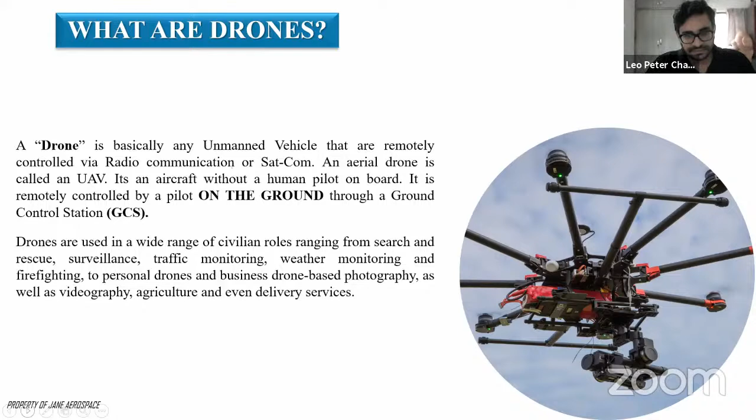So what are the types of drones? There are multiple types. The usual one we see is the multi-rotor variant, but we have other segments as well. Let's take a look and briefly see their advantages, disadvantages, and small use cases. Fixed wing systems are the early drones that came in. They look like a bird or an aircraft, and fly like one. You have longer endurance with them, lower power consumption, and another beautiful part is they have a glide ratio - so in case an engine or motor fails, you could still safely land the aircraft if you have enough velocity.

Now the second type would be the rotary wing or single rotor helicopter. These, after the fixed wing, were one of the early drones or UAVs that came out. Initial application was in cinematography plus agriculture. Way back in 1998, Yamaha built these helicopter drones for crop dusting, and they're being used and explored right now. We have the Schiebel Camcopter S-100, and a lot more - we have the Anavia and others using the same concept for heavy payload lifting and vertical takeoff and landing.

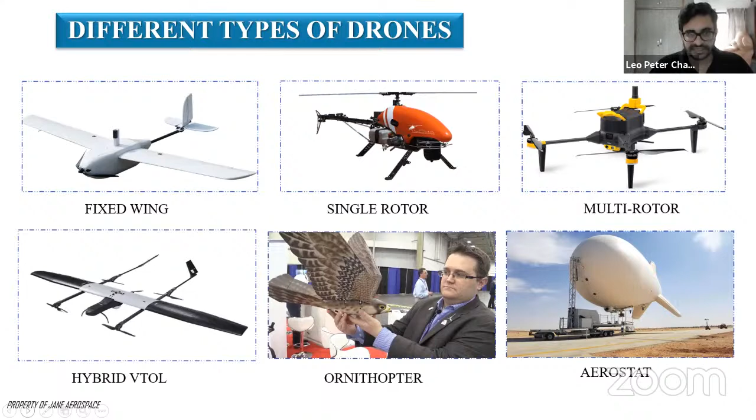So, introduction to windmill inspection. Windmills, one of the major sources of renewable energy and one of the major sources for carbon credit as well, are now being used along with solar power and tidal power across the planet to generate electricity to meet the needs of the country.

Windmills are generally 80 meters in height, that's about 250 feet, and the only way to get to the top is either to climb the ladder through the mast, or have a helicopter drop you on top. But the challenge with a helicopter dropping you on the hub is these locations are highly windy, with turbulence always created behind the windmill, making it difficult for the heli to land or drop somebody - it's always dangerous.

The other issue is climbing up means you cannot take a lot of equipment with you - it becomes very tedious. But these inspections need to happen, because over time, if inspections are not done, windmills will fail, and catastrophic failure is very dangerous since anything flying off from the windmill can affect nearby windmills. Fixing that entire mess is a huge problem.

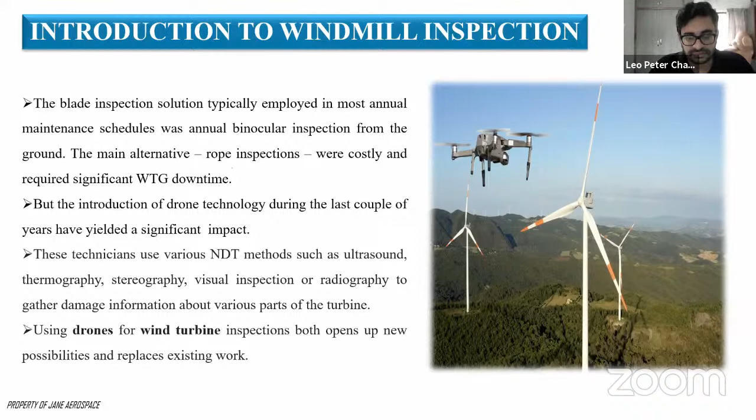So what they generally do is they have a very high resolution camera mounted on the ground that takes pictures. The problem with it is you cannot do upfront inspection, and you cannot do a very close inspection. Second, you will have to manually move the cameras to different locations for picturization, and you cannot have the sun at certain angles, because then you will never get the picture right. So that is another problem they face.

So that is one. Second, you will have to manually move from one windmill to another. The challenge is windmills are separated at a greater distance, and they are at different heights. Mostly they are on hills, so you'll have to go down and come up again, and that's time consuming, reducing the number of windmills you can inspect per day. So that is one method they did.

Second was you climb up to the windmill, somebody lowers you down or tethers you through a rope, and then you take pictures. The problem with it is, since these areas have high winds, you're always susceptible to swing, and during that, equipment can get damaged. The person doing the assessment can also be hurt. That also is a challenge, and with that much wind, getting a stable photo will also become a problem.

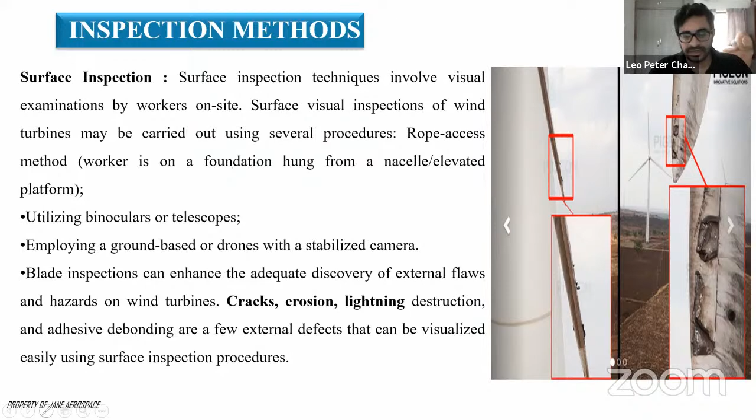So these are a few of the methods that are employed to understand. Subsurface inspection is very important because most of these blades are made from fiberglass to keep their weight low. The mast anyway is metal, but the blades are fiberglass. And you will need to understand crack propagation, because in composite material, crack propagation works very differently compared to a fully single metal or an alloy, right?

Now you will need to understand the thermal images. You will need to understand the shear. You will need X-rays of it. You will need to understand the stress patterns that are being developed.

And the best part also is if you are at a far distance and you have a very high resolution radiometric thermal camera, you can also see how the windmill is functioning, and you can study various indicators like the thermal image or the stress image when the windmill is in action. This cannot generally be done when using other methods like tethering down or climbing the windmill - you will have to stop it. But here you can do it, though you need to maintain a certain distance so that the drone doesn't get sucked in.

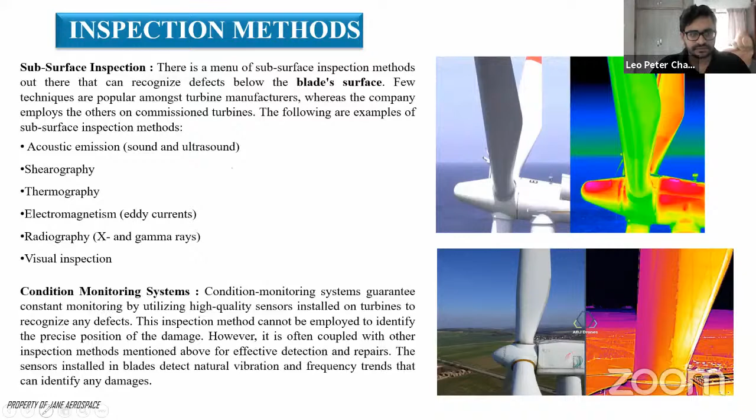These are a few of the images taken using drones, and you can see the details in the image - paint being worn out, the flesh of the blade being exposed, how much damage has incurred, and how you could repair these damages. That's another beautiful part about doing this. All of this data acquisition happens in a very short span of time.

There are multiple ways we can do data acquisition with a drone. Before we go there, let's talk about the payload. You can generally have single payloads or a coupled payload. Single payload would mean an EO camera, or electro-optic camera, for high resolution visual images. You can have a thermal camera for thermal images. You can have other sensors to collect various different data.

You can have an ultrasonic emitter to collect the thickness of the mast. You can also have X-ray equipment, contact based, to understand cracks. So these different payloads will have to go on a drone, and you'll have to choose a drone that could pick up these payloads. You can also do a 3D reconstruction of the entire windmill using the EO payload, which helps better analyze how these windmills sustain the impact of weather over a period of time.

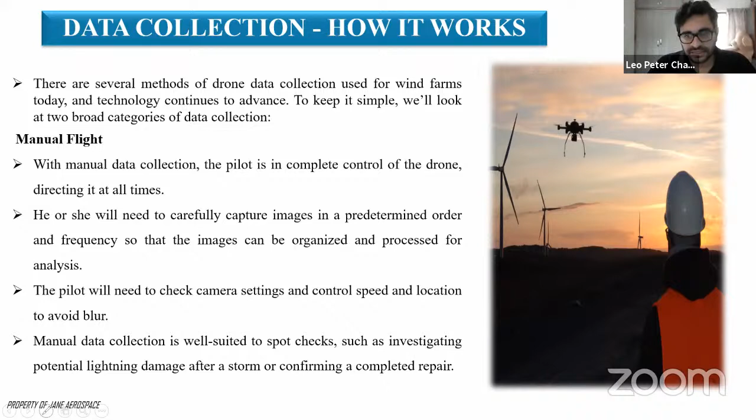The entire operation is not pilot dependent. Second, the drone chooses the best optimal route to gather the most amount of data, which makes a lot of sense for the manufacturer to run the maintenance. Third, every time this happens, the program evolves, and that way it becomes faster to get things done. And basically AI doesn't have the hesitation that it will crash the drone into the windmill.

Right now, when you fly from the bottom, the hub and the blade above it is even higher, 250 feet high, you will surely have parallax error and depth of vision issues to understand how near it is to the blade, and all of that becomes a challenge. And if you have the sun hitting your face, that becomes another challenge altogether.

But this doesn't happen with automated flight. The collision avoidance sensors on the drone will always make sure it's maintaining a distance. The algorithm running on the drone will account for wind direction, wind conditions, and gust speeds to determine the safe distance to be maintained from the blade, the hub, the mast, and it's continuously working. Manually flying, you cannot do that. It becomes very, very difficult.

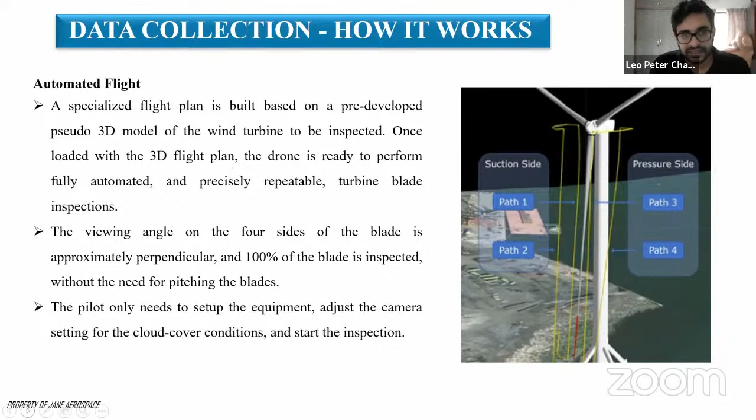For processing and analysis, first you will have to stitch the data. One is visual inspection—you look at photographs and identify where the damage is and what needs to be done. That's the report you submit to the OEM, and the OEM takes a call, because there are annual maintenance contracts. Governments or private parties buy windmills from the original equipment manufacturer, and they have annual maintenance contracts covering the scheduled maintenance of the windmill.

They take this data and decide what to do to make the windmill more efficient. Second is 3D reconstruction. Third is trying to understand stresses. Fourth is understanding the thermal emissivity of the windmill—if your generator is getting too hot, that's also another challenge.

So there are 4 important steps: organizing and sorting data, data processing, and data engineer review—an engineer from your side reviewing the entire data and its quality. Then you send it to the expert at the OEM, who reviews it and decides what needs to be done next.

Typically, the number of images that form a turbine's inspection database would be 300 to 400, depending on how old the turbine is, what detail we're looking at, and how critical it is. Now you have drones that fly inside the blade and take pictures, which wasn't possible before, because a human can only go from the hub to 30% of the blade, whereas the drone can travel up to 70% of the blade. That's a great advantage, helping to understand internal cracks.

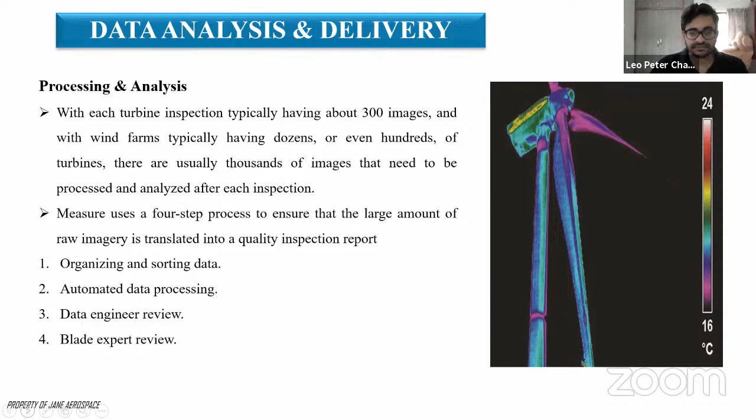So here's a brief explanation. The first part is where you capture data. The second part is where you organize the data depending on type, be it thermal, electro-optic, thickness testing, or stress testing. You organize it differently and provide it to the client. Then an engineer reviews the reports, and you provide it to the client, who has an expert to interpret that data.

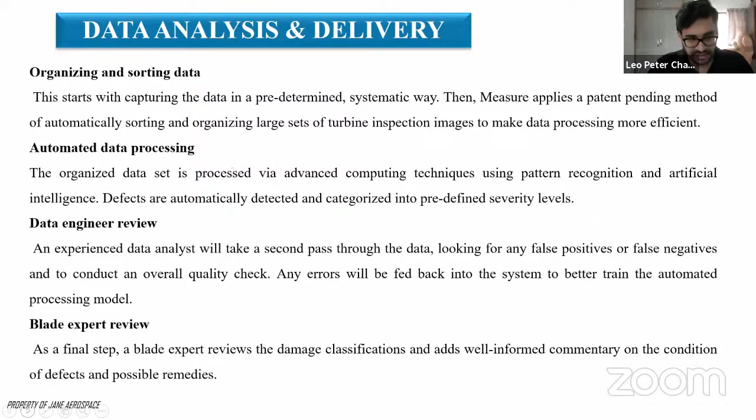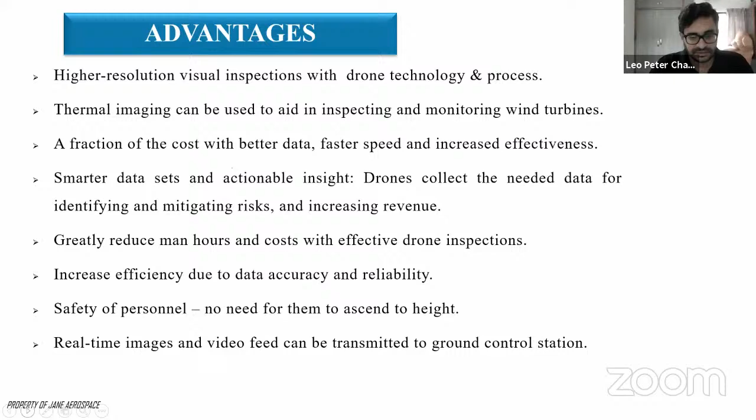Next slide, please. So let's switch.

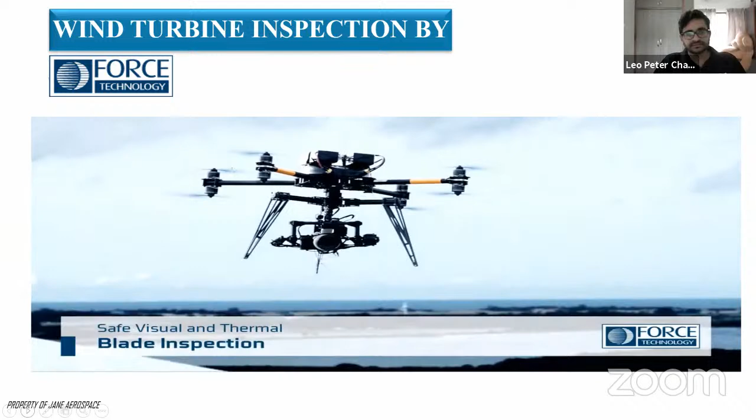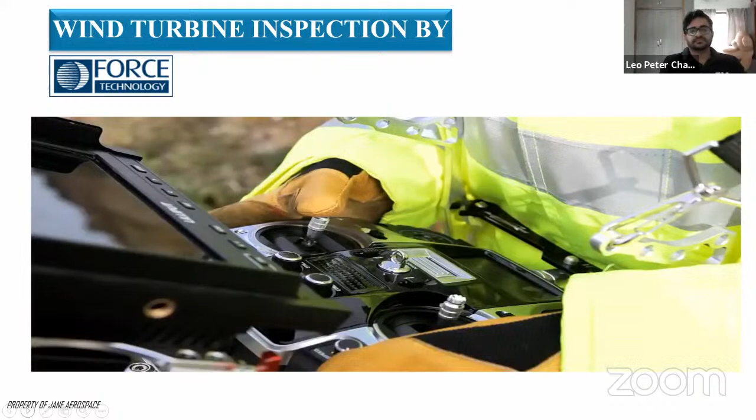Using Force Technology's advanced drones, it is easy to conduct blade inspections. The drones are continuously developed with image resolution and focus, providing unparalleled image quality. Remotely controlled without accessing the turbines, this ensures a minimum of downtime and production loss.

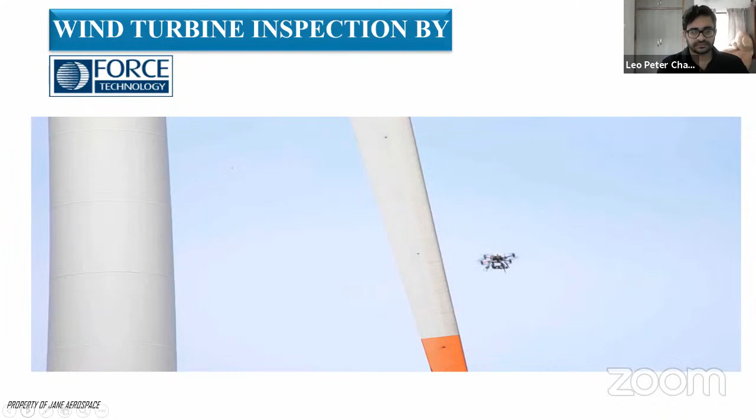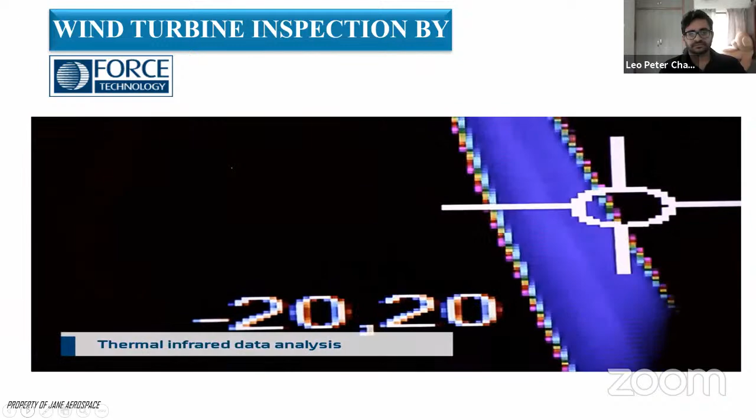After completing the on-site works, the data is evaluated by our expert, reported and documented. Using either visual imaging, thermal infrared inspection, or a combination of the two, we provide our customers with full documentation of the blade surface as well as some structural information.

Force Technology drone inspection provides an efficient mapping of visual damages to the blade, making it easy to plan repair works and general maintenance. Extent of inspection is done in accordance with customers' requirements, and reporting is delivered immediately after the evaluation.

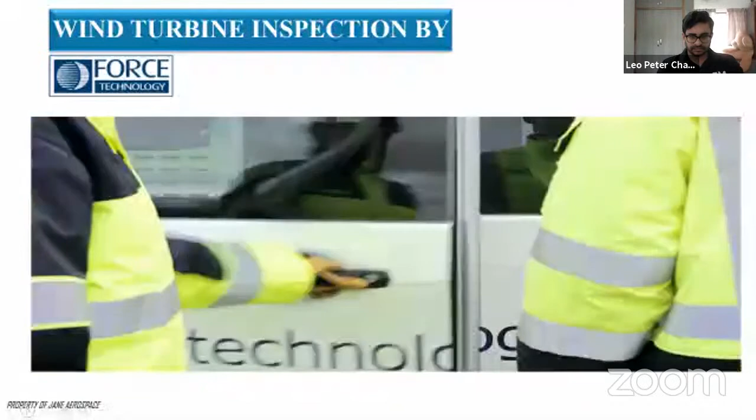So here you see this is a small video from Force Technology.

Another usefulness of this entire thing is you don't have to wait for reports like a week. You take the images, you can always send it via internet to your processing center, and they could prepare it in a day's time, and then in 2 days' time you will have the report, which was not the case earlier.

Second is, let's say you do manual inspection and then you climb up to the hub. By chance, if you leave any tool there, and when the turbine starts, that is always catastrophic, right? So that is now being 100% avoided during the inspection fully. This is another advantage that the drones have.

Next slide, please. Yeah, let's take a look at the video.

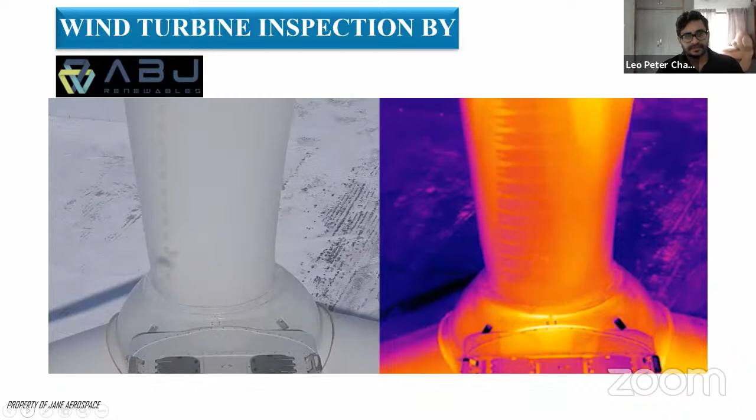So here you can see visual and thermal at the same time, it's a split screen. That's how close they can go with the drone, or zoom. Certain of these cameras come with 3x optical and then even 100x optical zoom.

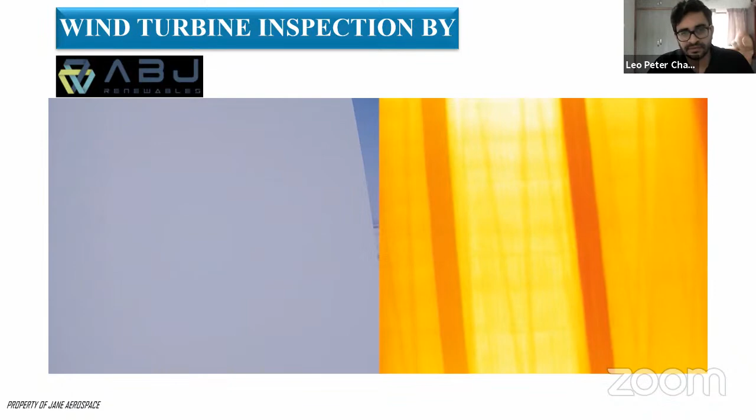Real-time feeds are clear. That way it even makes it easier to, if there's a maintenance engineer on the ground with you, it makes it easier to tell them what needs to be done.

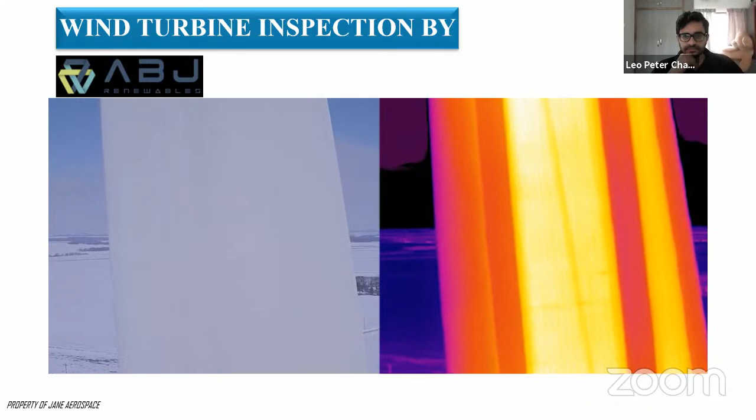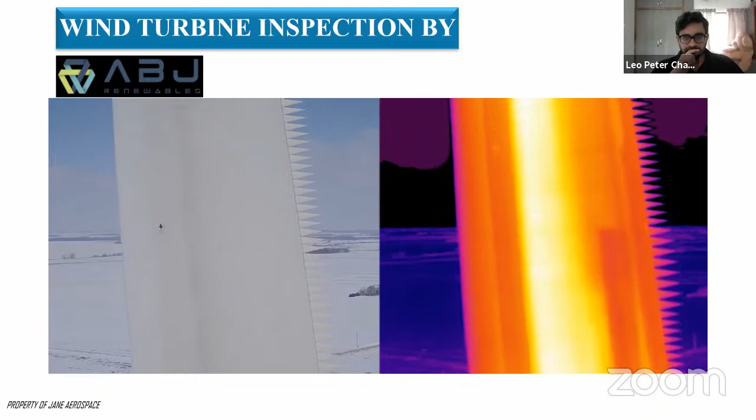Certain places, ice deposition also plays a very crucial role, that will also hamper the efficiency of this. So you have drones that clean or de-ice surfaces. What they do is they carry large de-icing agents that are sprayed on these blades that clean them.

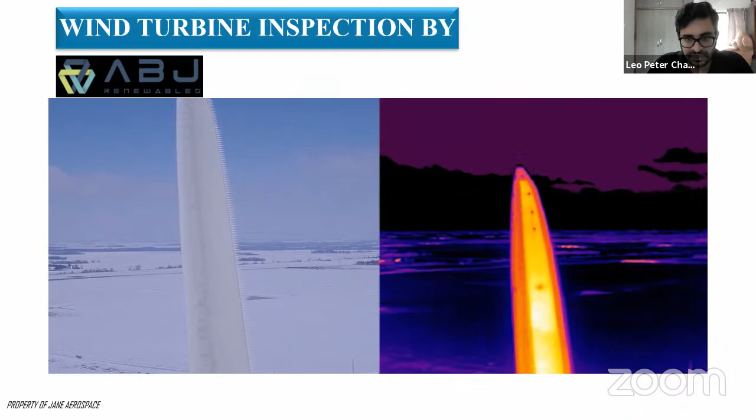So this is another way to see it. Next slide, please.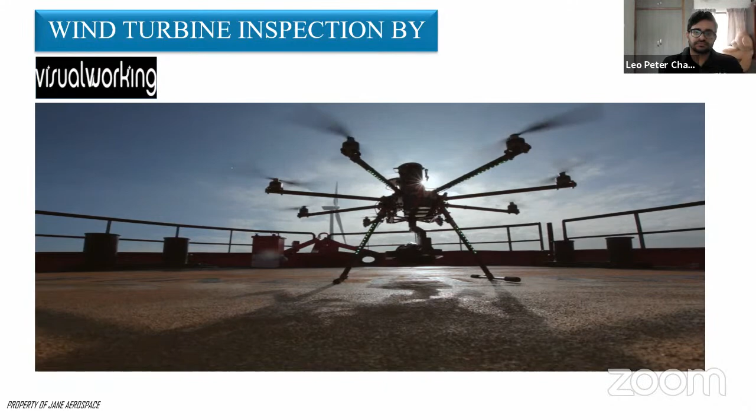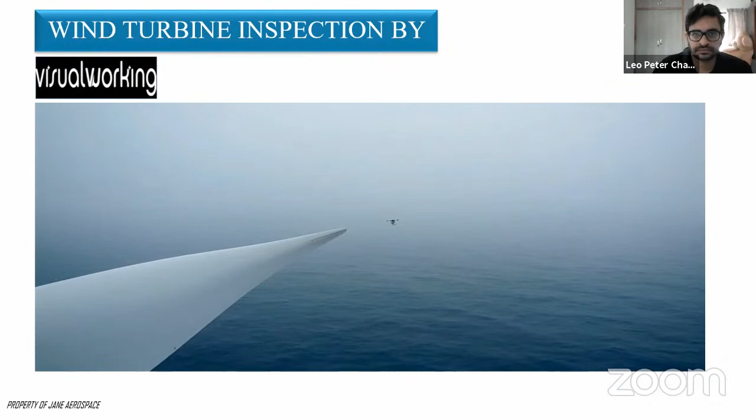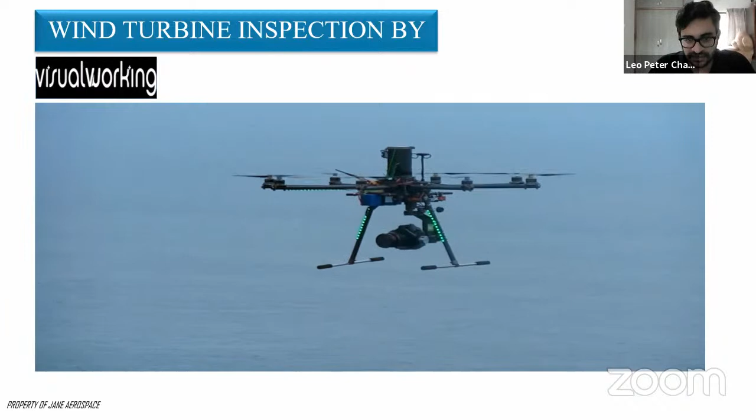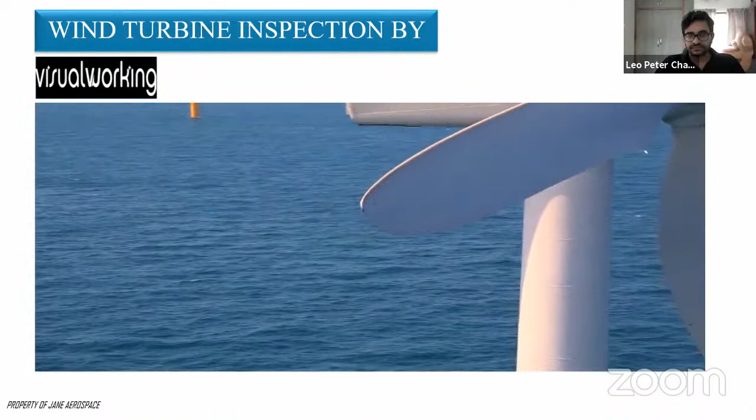This wind farm is located at 46 kilometers from the coast and is made up of a total of 165 blades.

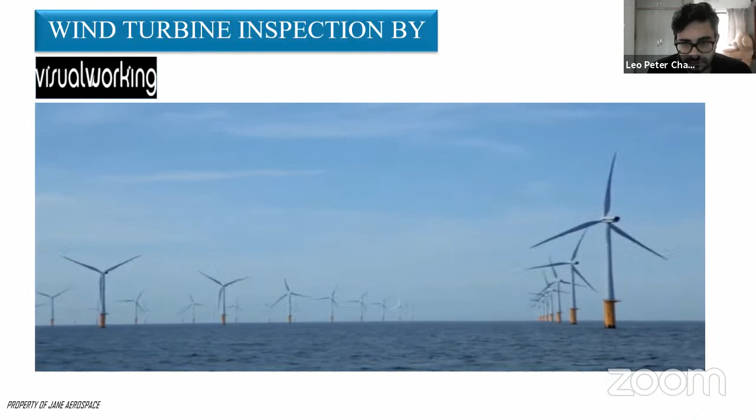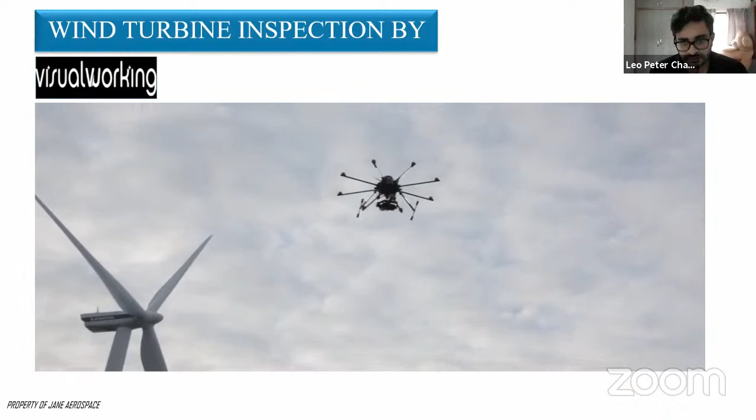Visualworking proved to be capable of delivering images of superior quality, with inspection time cut by 70% versus the standard approach of using rope technicians.

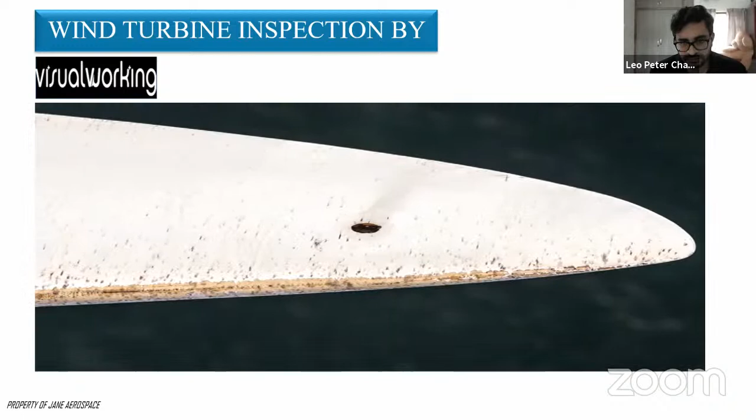A blade is inspected from all of its angles. So yeah, there's a very long video, you can always take a look at it on YouTube.

Here, another challenge that they've resolved is trying to dock the boat near the windmill, right? That is also a challenge that is time consuming. Here the drone just takes off from the boat and then does the inspection and comes back.

You really don't have to dock the boat near the windmill, then climb up, and all that time consumption, the time wastage that is there, that is being avoided. Next slide, please.

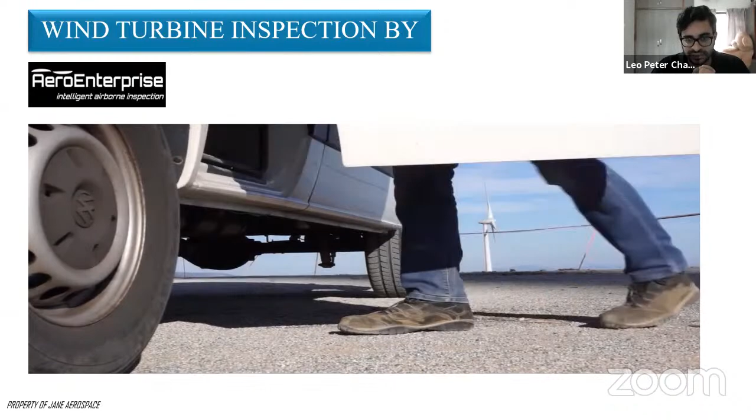You will see most of these inspections are being done by multi-rotor systems, not the great...

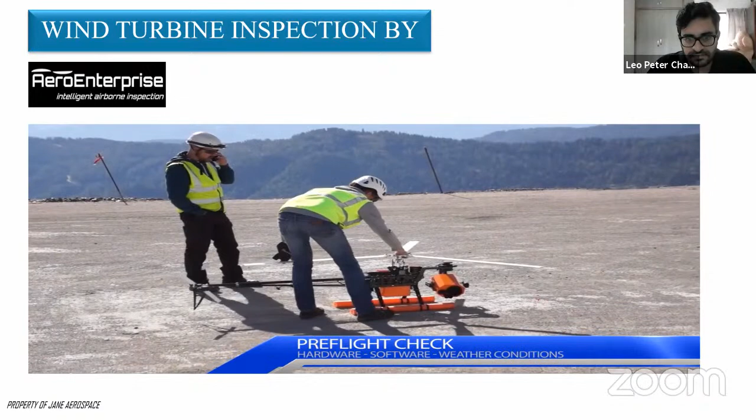And here you see the helicopter configuration for inspection.

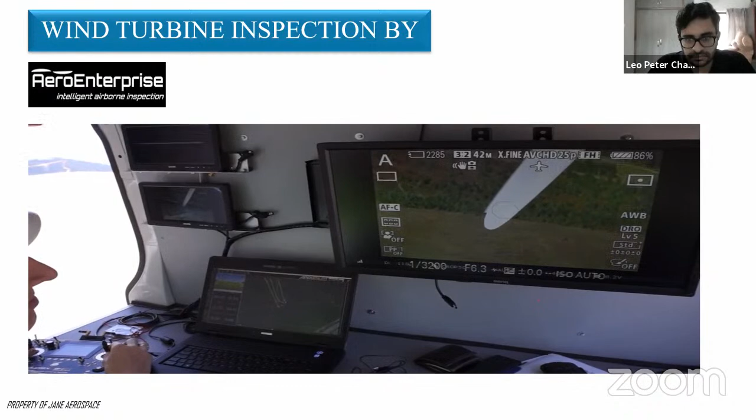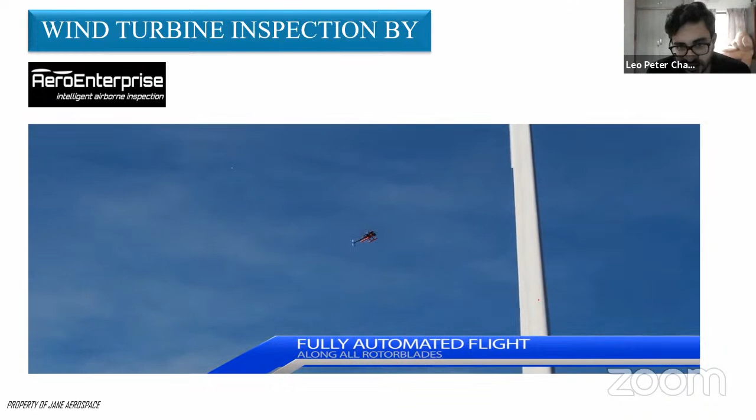Predetermined flight modes or flight paths that they enter, and then based on that, capture the next flight.

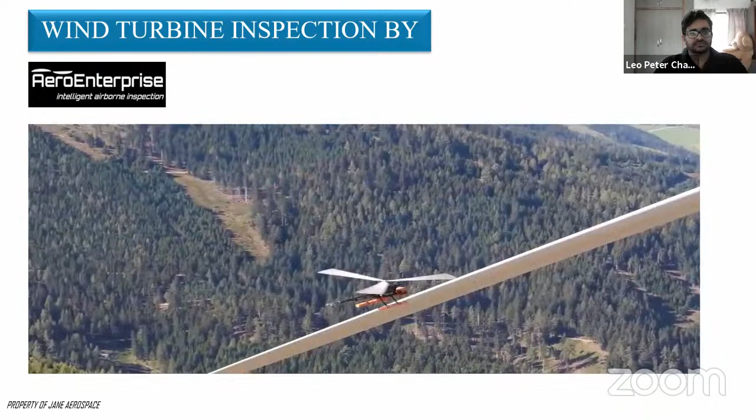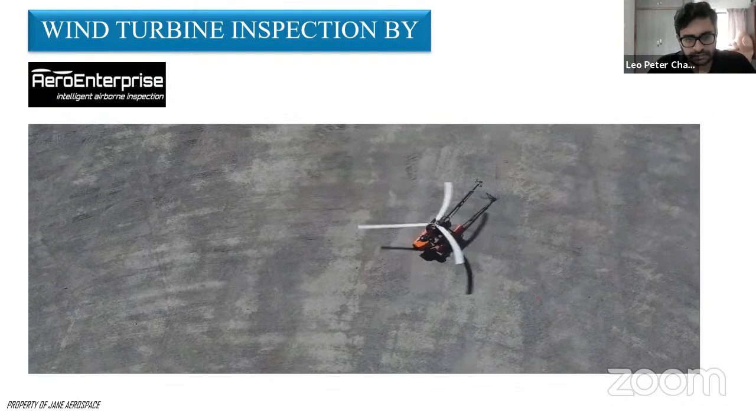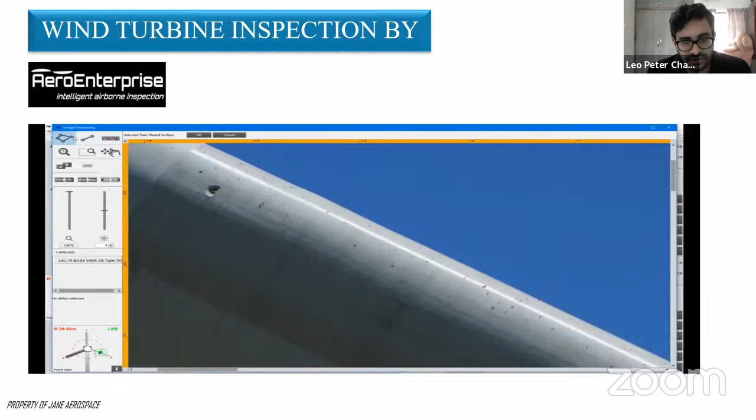That's a damage, right? So you can photograph that, and then that will definitely cause a problem in the efficiency of the windmill, and it is also easier to measure the dimensions, draw a polygon, and then see what's the area.

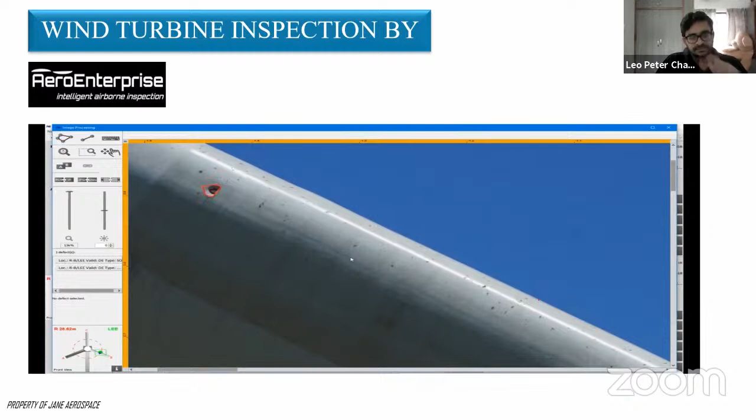Let's go to the next slide, please.

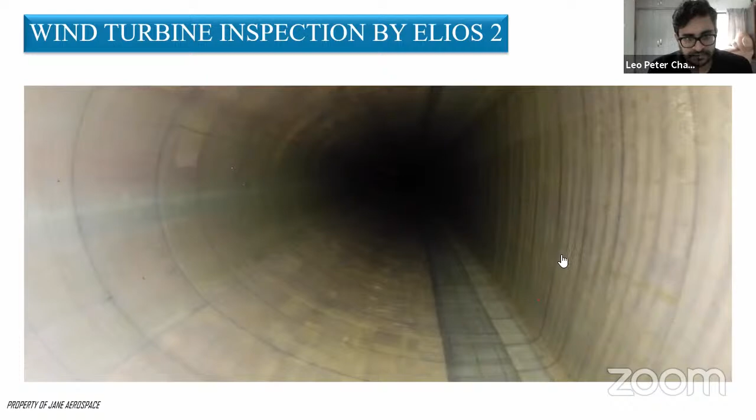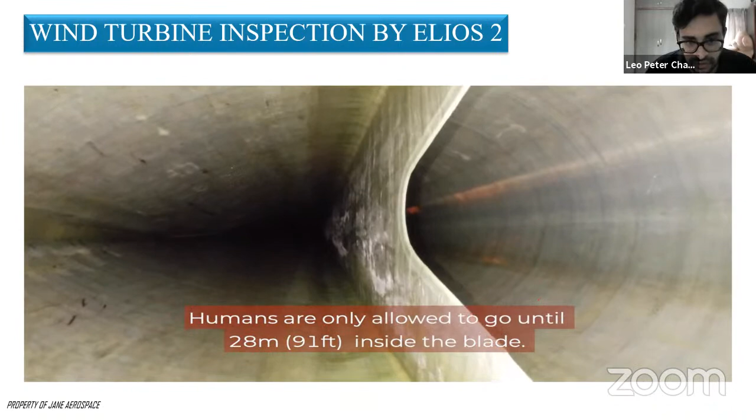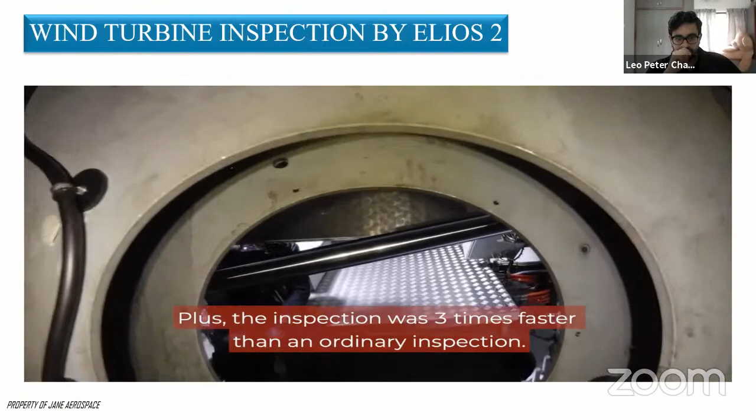This is the internal inspection I was talking to you about. From Elios 2, a company in Switzerland called Flyability has made this video. This is the drone flying inside the turbine. That was their recent use case, and it also makes sure there is no damage to the turbine because of either equipment being left inside or due to other human error. You can go further into the turbine blade for inspection.

Next slide, please. So that is about how drones are being utilized in the windmill ecospace, or the wind energy segment.

Let me introduce the organization as well, I generally do it at the last. I started this company in 2019 to help other drone companies scale up, because there were companies manufacturing drone products, companies providing drone services, but nobody in between connecting the dots to help them scale, because we missed the aerospace wave way back in the 70s and 80s since it was highly capital intensive. But my wish is that we don't miss the drone wave, and that is why we are building Jane Aerospace to work as an ecosystem supporter, helping companies scale up and then expand all over the world. That's the whole idea with which I founded the company. Today we've been supporting a lot of manufacturers and service providers with services as part of the ecosystem support.

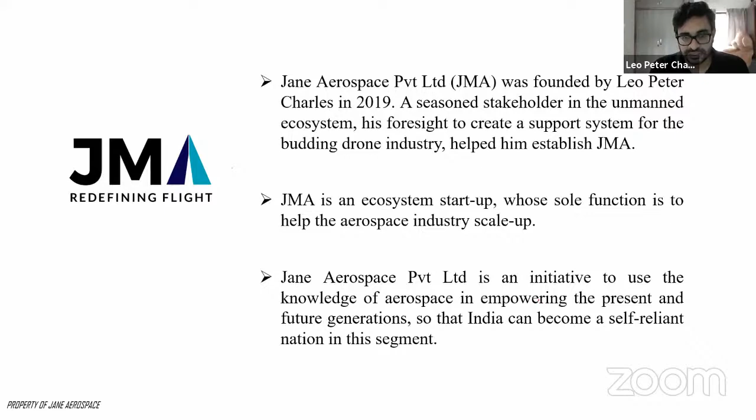So this is the advanced drone pilot training course. Many of your seniors have taken this and are now successfully working in multiple companies. This is one of the most extensive drone pilot training programs in this country, about 20 days long. We give you 15 hours of real-time flying, 15 hours of simulator. We also have soft skill training to prepare you for interviews, and we take you through advanced programs where you learn how to use drones for agriculture, cinematography, mapping, and survey. We also cover the DGCA syllabus. It's a full-fledged package, built on recommendations from the industry itself, and that is why we have a very high placement rate in the program. Next slide.